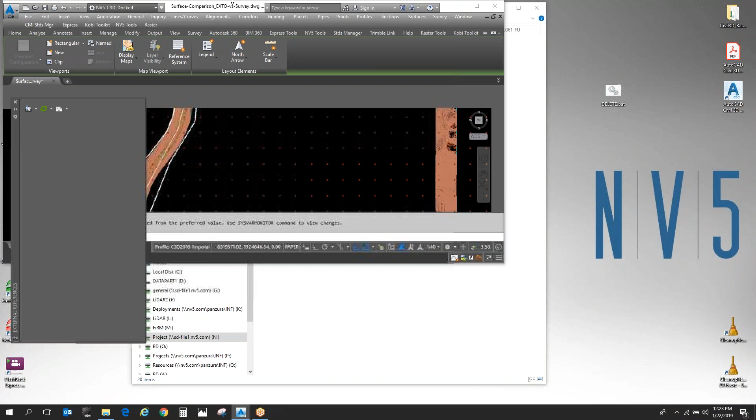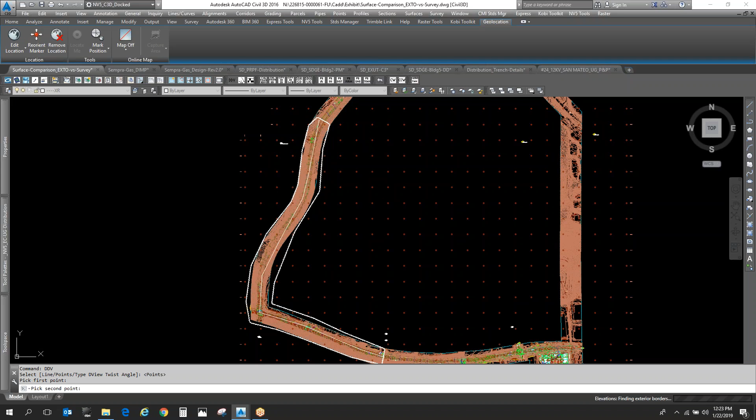All right, this is an issue that came up last week. Who wants to take a stab at UCS? Your UCS is this little icon here, right? What happens if my UCS does not look like that? Let's say it looks like... not that, because that's just going to rotate my view. Oh, and I should not have done that to this file. That was bad. What happens when your UCS does not have this little square in it?

So let me undo that. Oop. What does that mean when it doesn't have that little square? Yeah, there you go. It means that your coordinate system is not set to world, right?

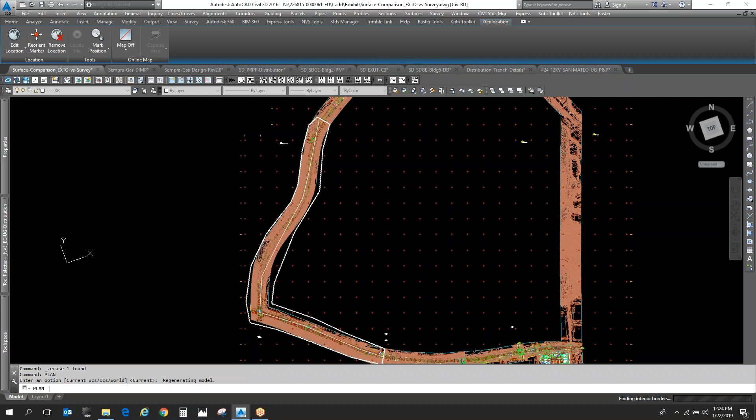So let's say your UCS looks like that. Let's make it so that you can't really tell that I defined my UCS. Let me rotate my plan so that the UCS still appears as an XY Cartesian plane, right? All right, so here it is. What happens now if I start drawing line work or trying to XREF other plans, other files? What's going to happen to those XREFs? Yeah, they're going to fly out in space, right?

So one of the things that we actually saw was the UCS was actually set not like this, not to world, but it actually had a 3D tilt to it. So everything that had been drawn in that drawing was no longer 2D line work. It was actually rotated in an XYZ plane, meaning none of that line work that got drawn was now accurate, right? Or true to scale.

So the UCS is a very important variable that a lot of times we take for granted and overlook. Really, there's no reason to change your UCS. Yeah, I was going to say, what would be the reason to do it? I don't know, if you can come up with one, I'd love to hear it. Looks better to you, that's all. Hey, I mean, yeah, you can always rotate your plan view, right? Yeah, and that's independent of your UCS.

So that was a really bad habit that I had for about 10 years, where I would constantly draw a line, change my UCS to that line, and then rotate my plan to current so that your stuff changes to that current UCS view, right? But then what happens, you forget to change your UCS back to world. You start XREFing things, and then they come out in space, right? So you don't have to do that because we have a LISP routine called DDV, right? That rotates your view however you want. So really there's no reason to play with your UCS. Leave it on world, all right? You can get into a lot of troubles when you start manipulating your UCS.

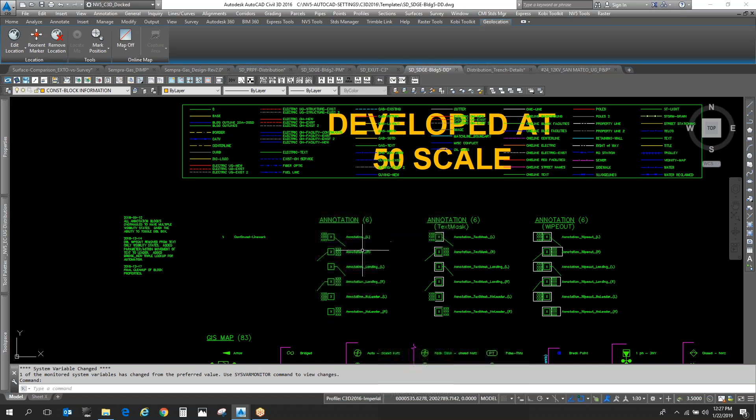So a lot of our files have a lot of proprietary intellectual property, right? That gives us a competitive edge in the industry, and it makes your life easier as drafters and designers, right? The last thing I want and the last thing that you want is to lose our competitive edge as a company. So we need to protect our data, right? And there's certain ways to do that. So I've come up with some LISP routines to kind of help automate all that stuff, right?

So there's a LISP routine that you can load. AP is for app load, which means you're loading a LISP routine. And this one is called, if I remember, transmit file cleanup. All right, so that's the name of the LISP routine. Again, you're never going to run this on your file, right? What's the procedure anytime you send a file outside of NV5?

Copy it to the deliverable folder, right? Deliverable, a folder with the company name you're sending it to, and then a folder with the date and a brief description, like 30% submittal or review by SDG&E, whatever it is.

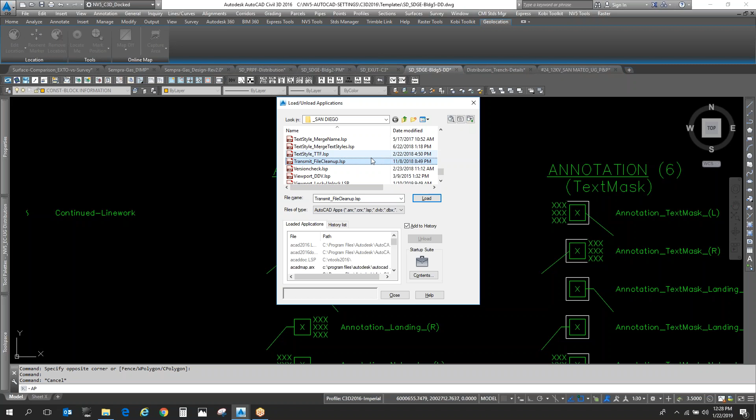You never want to run this on your file. You want to run it on the copy you're delivering. So I'm going to load this transmit file cleanup. Any Lisp routine I write will tell you in the command line to type file cleanup to run it. I'm going to type file cleanup.

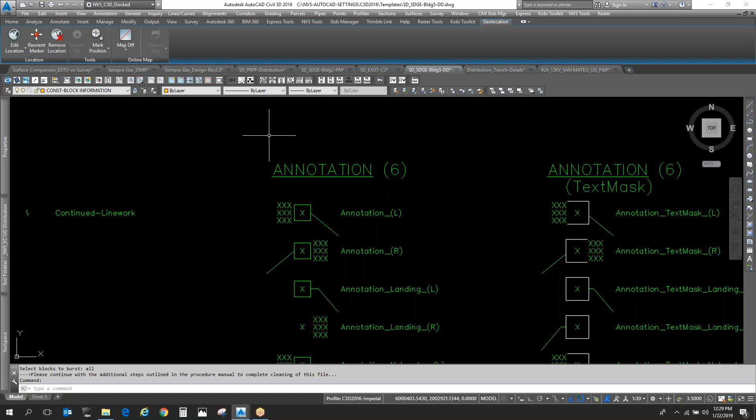So all those steps from your email are now one Lisp routine? They are one routine, but there are certain things you have to do. Right now it's saying select blocks to burst. I'm going to type all and hit enter. It's going to go through and think a little bit—it's actually exploding all those blocks, but not really exploding them.

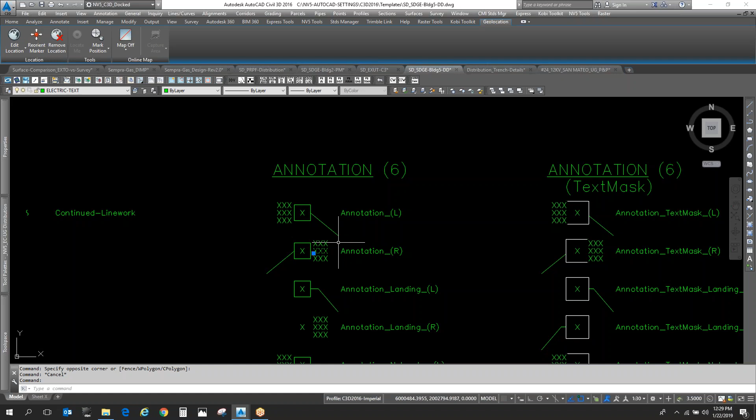Because if we explode it, it would still have intelligence to it. If you look at that document, I outline exactly what the Lisp routine does. The routine I wrote combines three or four different routines. What it actually does is explode everything to basic line and text, meaning we're keeping everything in-house. So this is no longer a dynamic block, no longer a block at all—just basic line work and text, which is what we want to send out of this building.

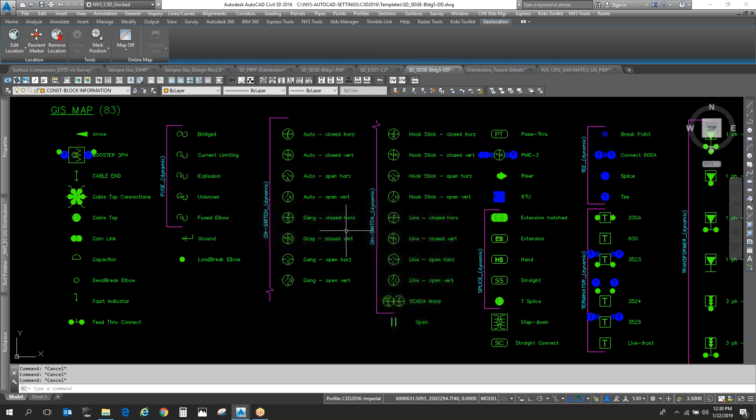Yeah, we can give them line and text—that's what we want, right? We don't want to give away any of our blocks, and we definitely don't want to give away any of our dynamic blocks. So this protects NV5's property rights, and protects your jobs. The more projects we get, the better we all are as a company.

Jared, question—Rick. When you burst that block, I saw that white outline. Does that mean it went to zero, right?

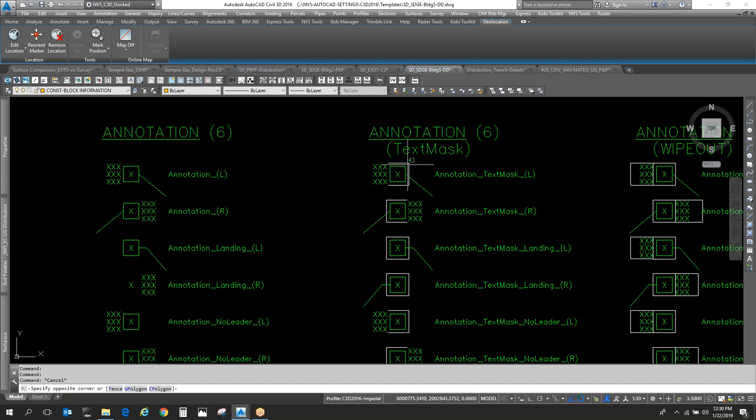So this white outline is a wipeout. This was requested by a lot of the groups. What you're actually seeing is the display order got kind of screwed up, so it's always good to send your wipeouts back behind. You'll notice we kind of lost that DBL box outline—if we send those behind, it comes back. It's on a wipeout layer that's non-plottable, but it wipes out the stuff behind it.

All right. You want to leave any of that information down to zero, zero. Oh yeah, so that's also included. That's the first step, actually, before you run the Lisp routine—to delete this block matrix, right?

This block matrix is just my way of telling you guys everything available in our template, in terms of blocks. Obviously Civil 3D styles, and there's a lot more, but these are all the blocks in the template for you guys to use. It's my way of communicating all that information to you. If we don't delete this, and if we don't run our program, we're basically handing it all to our competitors.

So yes, read that document. I did email it to everyone, so you should have a copy in your email, but it also exists on our server—under Q, training and learning, NV5 manuals and procedures. All right, so that's section C, sending files.

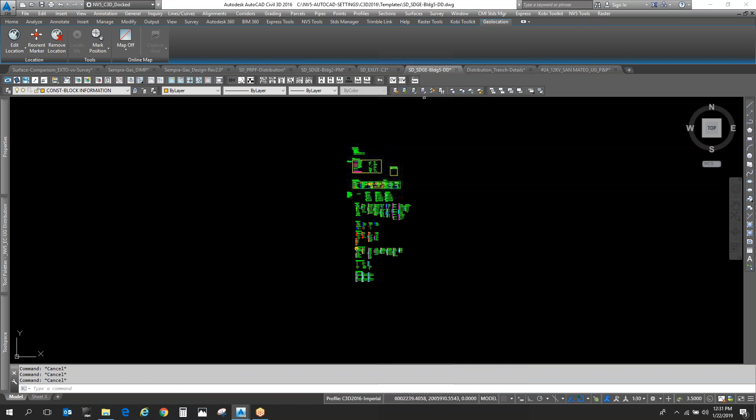All right, I'm going to close that file. Jared—yes sir, how do I get to the San Diego folder? To where we have all the Lisp routines? Yeah. Let me open my template again real quick.

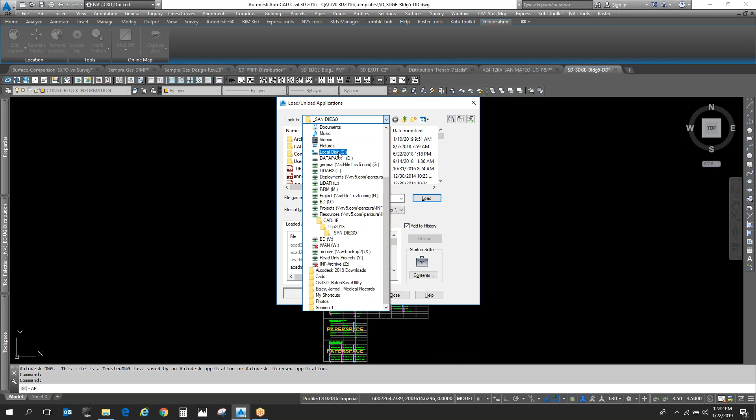So everything has been stored locally on your computer. We're trying to get away from utilizing our network, so hopefully your computer has the latest update and it's pathed to your C drive. This one actually isn't—that's fine, you can use the Q as well, but I'd prefer if you used your C. So I'm going to show you on your C drive, all right?

On your C drive, everything dealing with AutoCAD is under NV5 AutoCAD settings, Civil 3D shared, and then LISP 2013—that's where they all are. And then there's the San Diego folder. Anything I've done here over the last four years I've kind of put into that San Diego folder and given it some naming so you can easily find it, right?

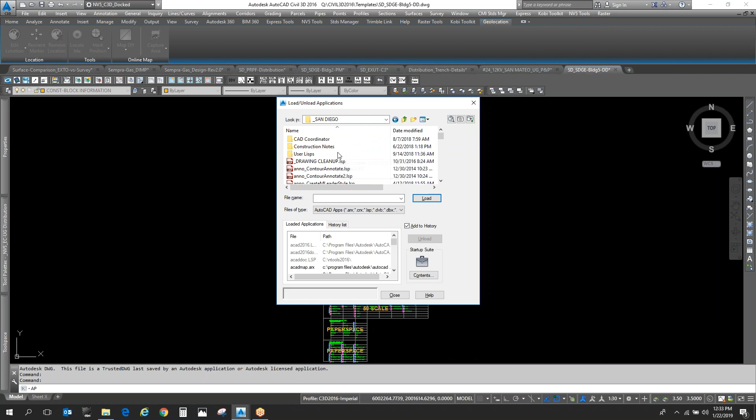This makes it so that you can also take your computer outside of the office and still have all of our resources and still work. There's a lot of different reasons for doing that.

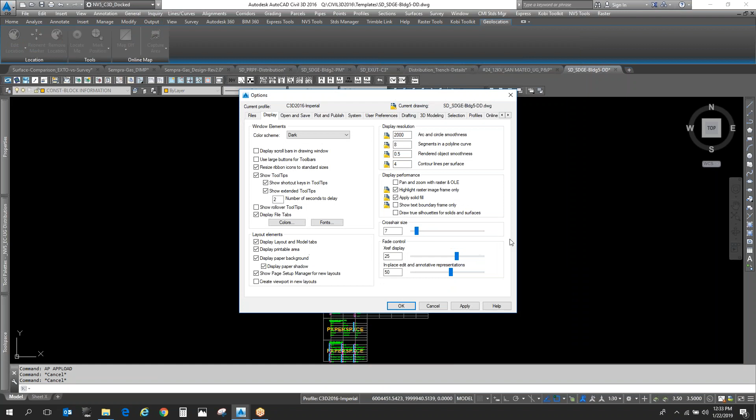One of the things we ran into, and my computer is a prime example right now, is every once in a while you see that red X on your drive. If you open AutoCAD and one of your drives is disconnected or has that red X, it actually removes the path from AutoCAD. So what started happening here, especially with our wonderful network, is those support file search paths disappeared. That Q blah blah blah to the LISP was getting removed. That's why for a while you couldn't use INA and ISC, all that stuff. It's because at one point you opened AutoCAD with that red X on your drive and it removes the support path. So that's some of the reasons why we're continually moving things to your C drive more and more.

Now I'm doing almost everything, not quite everything, but almost everything. LISP is one of the new ones that got moved to your C drive. If you're ever in question, you can go into options, go into file support, and you should be able to see where that path is. So right away here, you know this computer's seen the latest update, and that's the path to the LISP routines on the C drive.

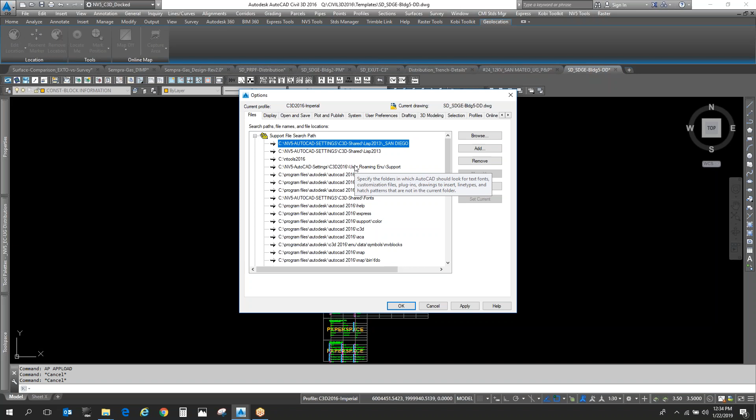So there are a couple new LISP routines. I'm not really going to cover them too much, just kind of mention them, not going to demonstrate them. There's a LISP routine for GIS data where you can select by object data, so you can start utilizing your GIS information to put those entities on special layers, and then utilize them in AutoCAD like you normally would, by layers, not by attribute data.

And then obviously there's some LISP routines, part of that transmit file cleanup that I wrote independently. There's one for block dynamic strip, which takes that dynamic block and explodes it so that it loses its dynamic properties but still remains as a block. Then there was another one I created that was basically block burst, to piggyback on that dynamic strip so that it will actually burst all your attributes into lines and text, basically.

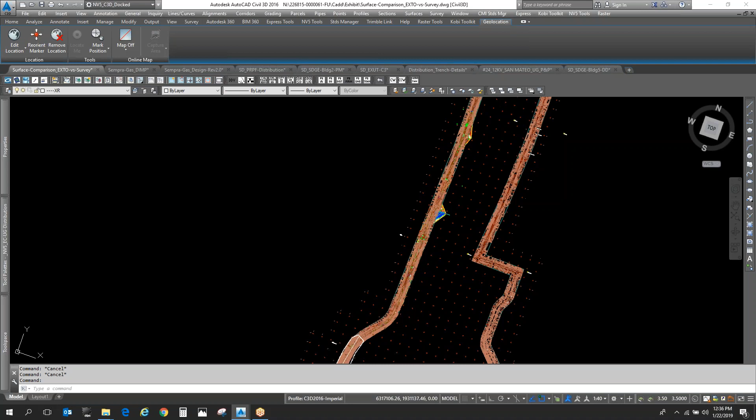He discovered an error with the project that previous ten designers didn't notice, and he caught it at almost a 60% submittal. This would have been rather embarrassing if these plans had left our building in a construction phase and we hadn't discovered this.

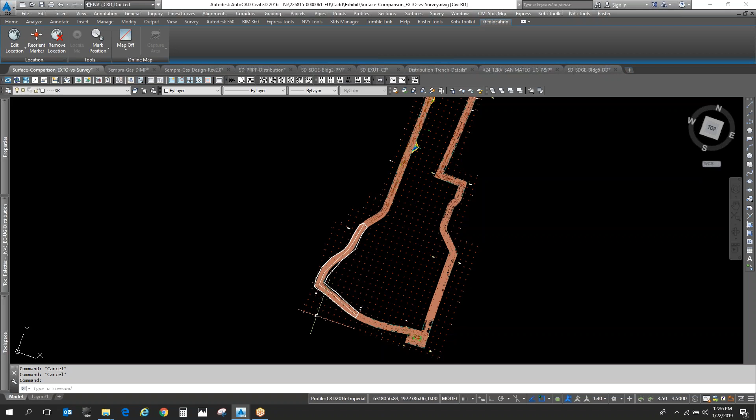So what did he discover? He discovered a bust in the aerial topography provided by the aerial consultant. The bust was about 2 feet vertically over about a mile length of the project. So what you see before you is just that. All this is the project here, and everything in this white cloud is the area that is busted by about 2 feet vertically.

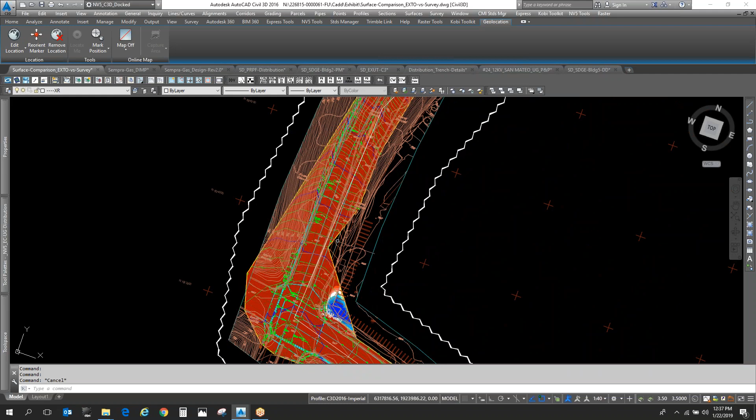What I did real quick was take our survey shots, all of our potholes, create a surface, and run a volume surface to compare the two, the aerialist versus our survey, and started coming up with all these color schemes. If I hover my cursor over here, I don't know if you can see that very well, but there's a 1.84 feet difference between the two surfaces.

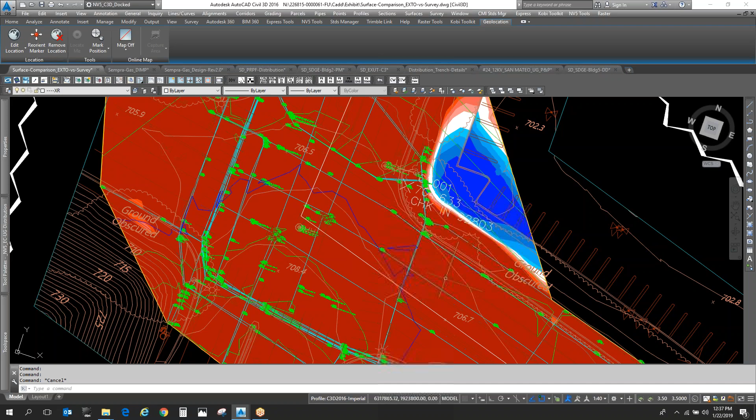So we had plenty of opportunity to catch this, and it really should have been caught prior to the 60% submittal stage. What are ways that we could have caught this earlier? How did you catch it? The easiest way is to turn your drawing sideways, like this, sometimes the 3D view or whatever.

Well, you took our survey shots and looked at it. I did, yeah, because you would see the survey shots hovering like on the ground. That's a very good way of doing it.

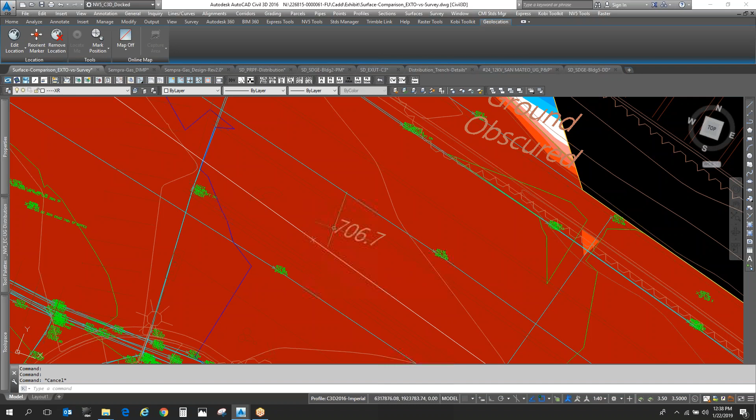So a couple things is, you don't even have to use 3D to see the difference, right? Your topography file that the aerialist gives you contains spot elevations, right? And part of those spot elevations is this big, bold, ugly text. So right away, if I'm halfway looking at this project, I see this call out here, and I see our survey shots on either side of it, and our survey shots are over 2 feet lower, right?

So really, you don't need any Civil 3D knowledge. You don't need to do a 3D orbit. You don't need to do any Civil 3D functionality. Just seeing what's on your screen could have alerted us that we've got major issues somewhere in our design.

Fortunately, it wasn't our fault, it was actually the aerialist's fault, so we don't have to eat all that time. But this could have been caught way sooner, right? 60% after profiling our electrical trench, after doing all of our pothole utilities and profile. This could have been caught and should have been caught a lot sooner.

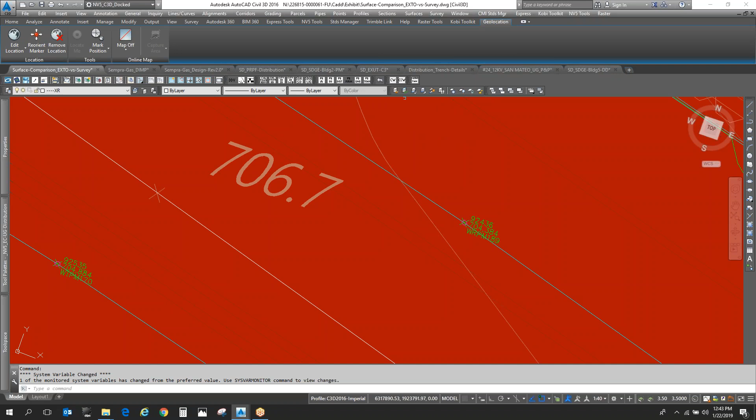All right, so good job, Gary Cooper. Gold star. Thank you. All right, the next thing.

This came up a couple times over the last couple months, so I wanted to review it real quick. On your pipe networks, let's say we're creating encasement, electrical encasement. So I'm going to come in here and edit my pipe network, that's how we create pipes. I'll do electrical package, and the only one available is a 12 by 12. Sometimes we don't have the real dimensions, but sometimes we do. Sometimes we get the pothole at the top and the bottom, and we need to represent that, especially if it's a 36-inch high package. We need to model that correctly.

So how do we go about doing that? You actually need to edit your parts list. In your tool space, under your settings tab, you'll go to pipe network, expand your parts list. Make sure you're doing it in the right file. This one is the EXEC, existing electrical. Right click, edit. It'll bring up this, make sure you're on the pipes tab. Here's your electrical package custom sizes.

So we can expand this and we can see there's just a 12 by 12. This is where obviously I could populate every single combination of pipe encasement, but that would be impractical. It'd be hundreds upon hundreds of possibilities. So it's really up to you guys to add these as you find them in your project. It's rather easy, you just right click on your electrical package custom size catalog, add part size.

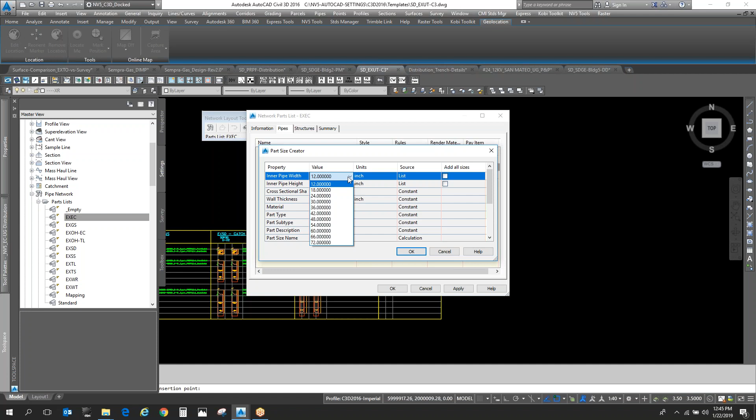These are the two parameters that you add: the width, typically we don't really know that, so I started at 12 inches and you have 6-inch increments. Don't get caught up on the width of it. The really important thing is the depth. Try to get the width right, but a lot of times you're not going to know the width. The important part is the inner pipe height. These start at 8 inches and go incrementally at 1 inch all the way up to a 90-inch depth, or high pipe or encasement in this case.

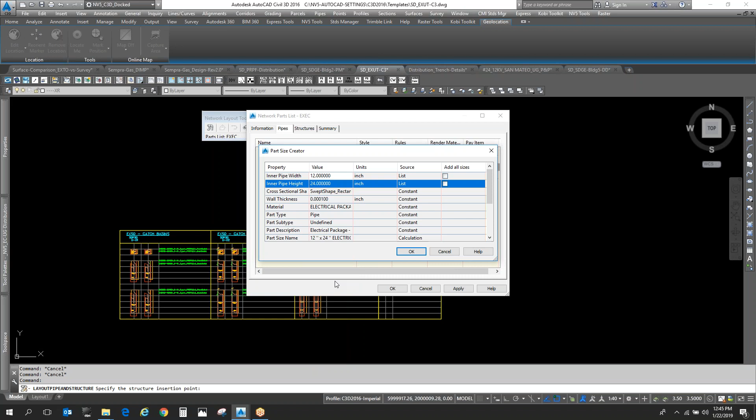So let's say we'll do a 24-inch, we'll hit OK. There's one other thing that you need to do after adding it, and that's to assign a style and rules to that newly added part. If you add multiple, you don't have to do it to each one. The trick is this little save icon button, why it's a little disk, I don't know. But this will apply it to everything in this family. So I'm going to do that.

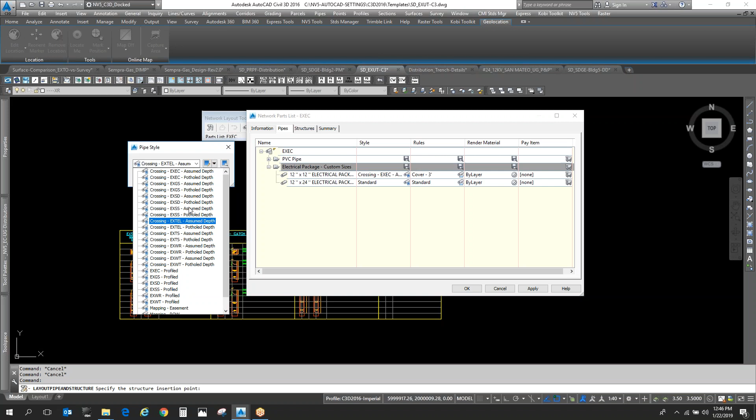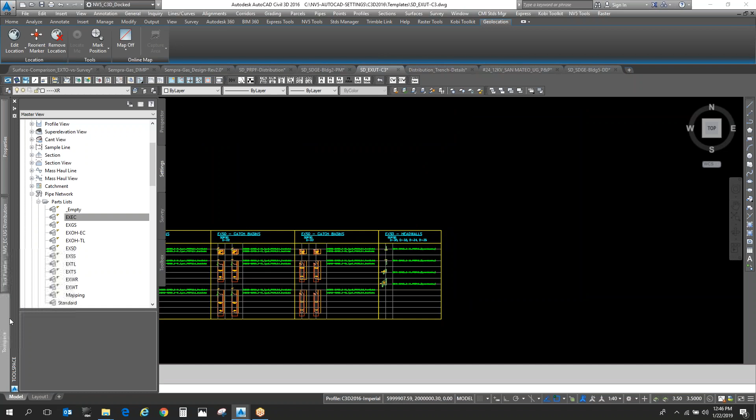So electrical, I'll change it to pothole just for fun, and you'll see both of them update. Same thing with the cover, typically just follow what's there: cover 3 feet, cover 3 feet. Then you hit OK. And then suddenly, sometimes you have to close this because it needs to reread it. So we'll go back to Prospector, edit my pipe network, and now I've got the 12 by 24. So for all your encasements, that's going to be critical. You guys need to go through those steps to add those custom part sizes to your drawing file.

Next question, participation: what goes in your PRUG file? All right, so we got alignments. What else? Profiles. What's that? Structure bed. Pads. Anybody disagree with any of that stuff being said? Profiles? PRPF, profile. Okay, yeah.

How about a trick question: there should not be a PRUG file on our network, right? What does PRUG stand for? I thought it meant proposed underground. All right, so if it's underground, what is that? Is it your alignment? Is it your profile? Don't we have separate files for that information? All right, so part of this is a little bit on my fault, I'll man up and take ownership of it. So I've corrected that error.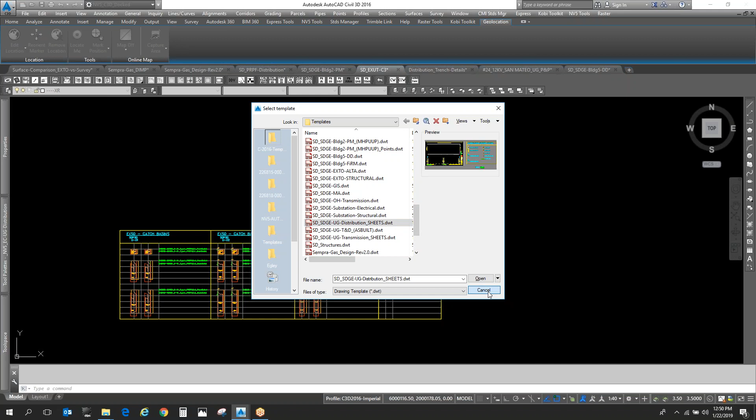So hang with me, we've got still quite a bit to cover, but I'll wrap it up here shortly. Some things to keep aware of - there's another new template. We keep expanding our service offerings, which means we need new AutoCAD templates and new tool palettes to support all these workflows.

So the first workflow that's kind of new is called DIMP work for the gas group. If you're in the gas group and you're working on DIMP projects, you now have a template and blocks to help you with that workflow. You also have a tool palette specifically designed for that - an NV5 gas DIMP tool palette, with existing fittings, annotation blocks, some simple parts, and proposed fittings as well. That's all in the template and tool palette to support that workflow.

All right, the next gift card goes to Edgar. What? Yeah, exactly, so he gets credit for this.

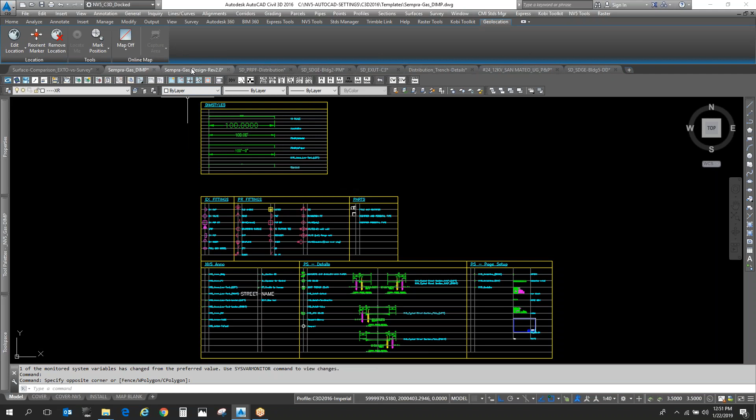He gave a lot of valuable input on our gas design, alignment, and profile labels. He brought to my attention that we really need different labels for an as-built completion set as opposed to design. So now inside this template, we have that developed thanks to his input. If I go in here and look at alignment label styles, station, profile geometry point - we have labels for as-built and design circumstances, the difference being how we treat the pipeline stationing. In your as-built, you just have your PS, no HS, and in design I believe you have both your HS and your PS.

So kind of labels to support that - that goes with your alignment profile geometry points as well as your profile horizontal geometry points. Both of those have been developed due to his input, and that should speed up a lot of your drafting for those plans.

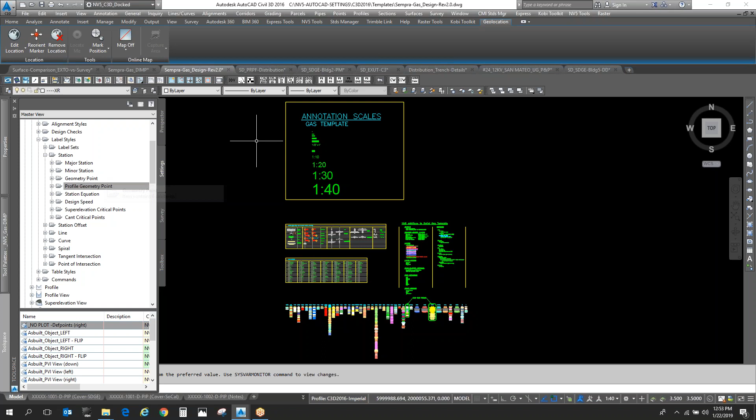This next one you guys should be pretty excited about. Let's see here, which file - this one here. This is something that will be implemented in the next day or two. So this is our PRPF. The first thing I'm going to do - well, not the first thing, but in this case, I'm going to bring in some pipe networks. So there's only the PREC.

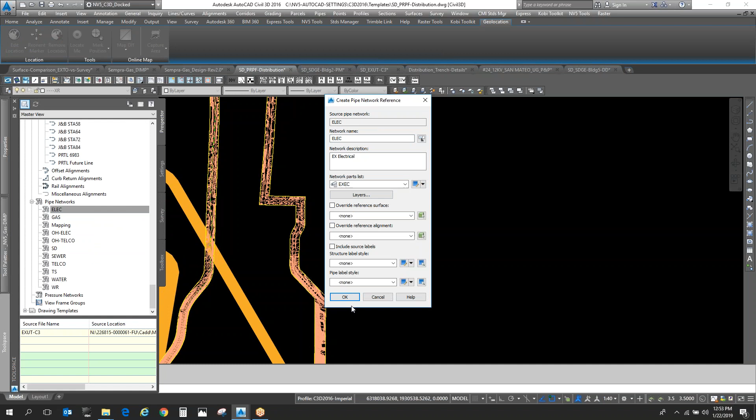I'm going to bring in my electrical, and I'm going to bring in my gas. Then the next thing I'm interested in is creating a profile view to kind of see what those pipe networks look like.

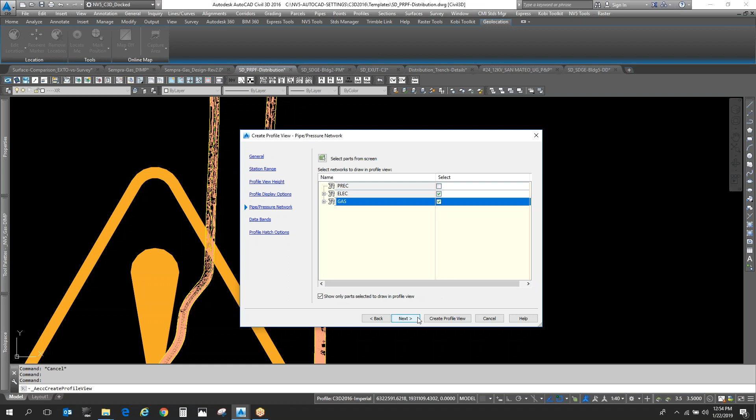Previously, what did it kind of look like when you brought in pipe networks? Just a bunch of green circles, right? And it was pretty difficult to distinguish what network it was or what utility it was. So we've made some modifications - if I zoom in here, you can start to see each network will have a separate color. Your red is going to be electrical, and it's actually going to come on its own layer as well - so pipe network profile, electrical, and then same with gas.

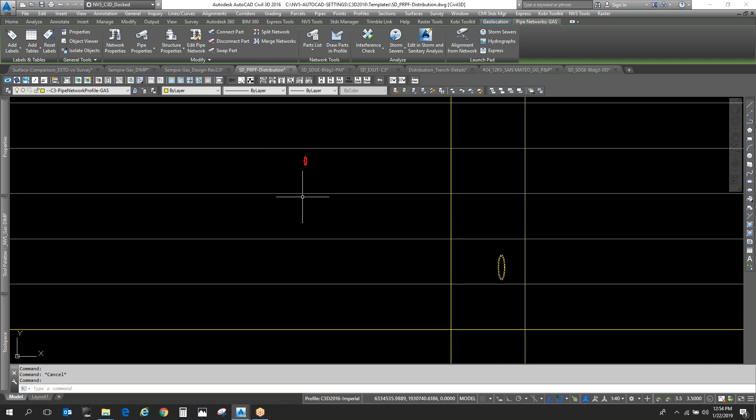Gas is going to be yellow and come on its own layer as well. So this will help you guys distinguish between what utilities you're seeing. It'll kind of help you judge depths, right?

This is electrical. I expect there to be how much cover on an electrical line? About 30 inches, 36 inches. So does this look reasonable?

All right, how about my gas? How many inches or feet of cover? 4 or 5, right? So does this look reasonable? Yep. 1, 2, 3, 4.

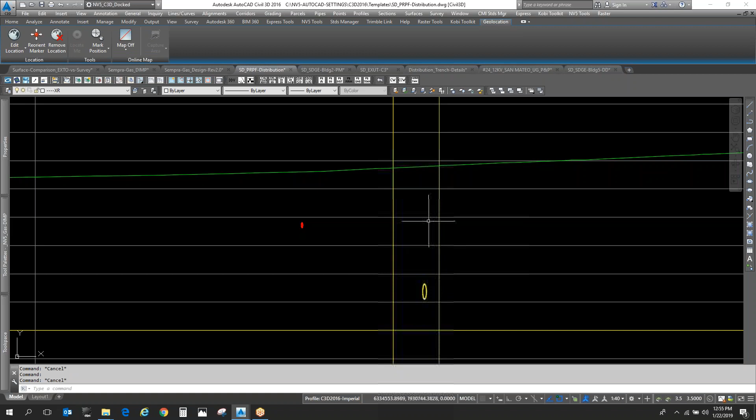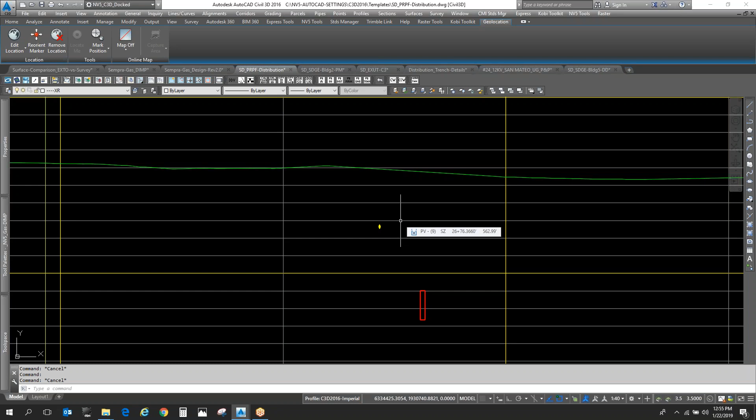Yes, right? So hopefully it helps you guys identify your utilities a little bit more easily, makes your design a little bit easier to understand and gives you a full grasp of what you're seeing on your screen. That's something currently not in the template, but will probably be there by the end of the day. Not quite formulated correctly in the template yet, but I did it on this file real quick. Expect to see that. It'll kind of follow the same colors as our exhibit.

In terms of telco, it's a purple line, sewer is magenta, storm drain is the green color.

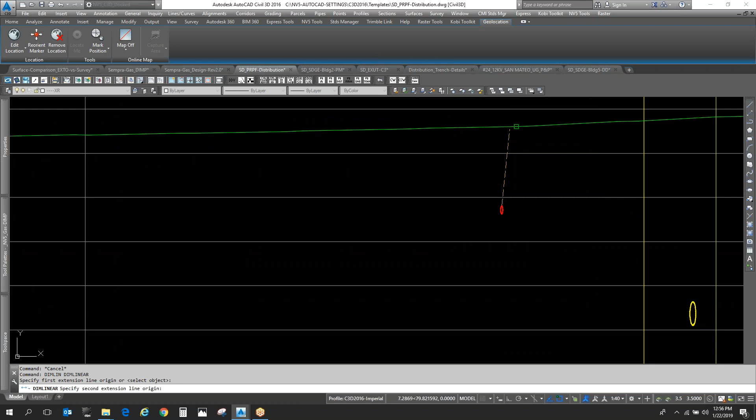What I'm suggesting you do is just do that. Is that what, just automatically? Automatically. When you label, when you annotate, you do complete network. And that dimension is reduced to 0.4, isn't it now?

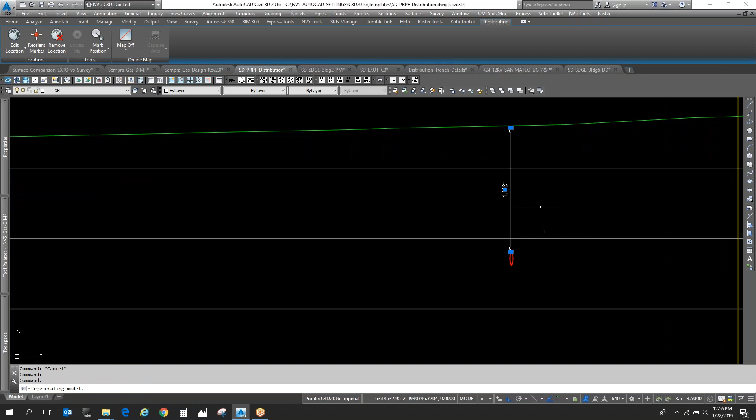I don't know, I created just a random dimension. So this is on a 2 exaggeration. Obviously, mine is 4. Yeah, okay. So obviously before you create your dimensions, you set your dimension style to current.

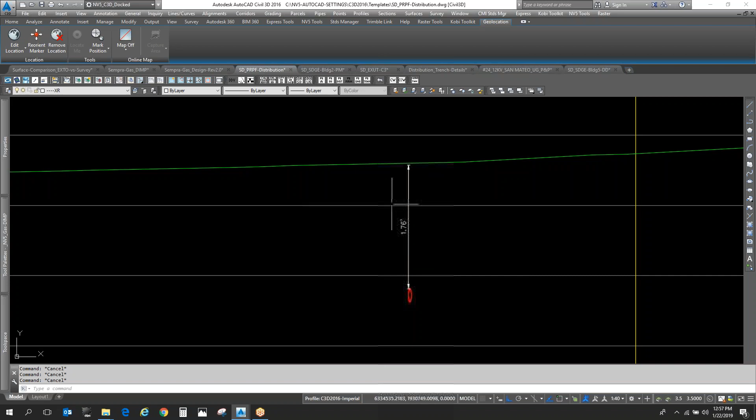Or another annotation style, maybe just for that. I don't think there's an automated way to do it. I'll look into that, but I'm very doubtful there's a way to get that to work. The way I currently do it is just a linear dimension, and just don't be super picky, but something close.

You can get the depth in the annotate on the profile annotation. You can, but you still have to pick the 2 points. It just creates a label, and you do the same thing. Yeah, you could do an annotation.

This may be a little bit better in terms of if things move. The dimensions are a lot easier to manipulate. Either way, you should have some sort of annotation here. Whether you use a dimension or annotation, you should be able to see quickly the cover on all your existing utilities.

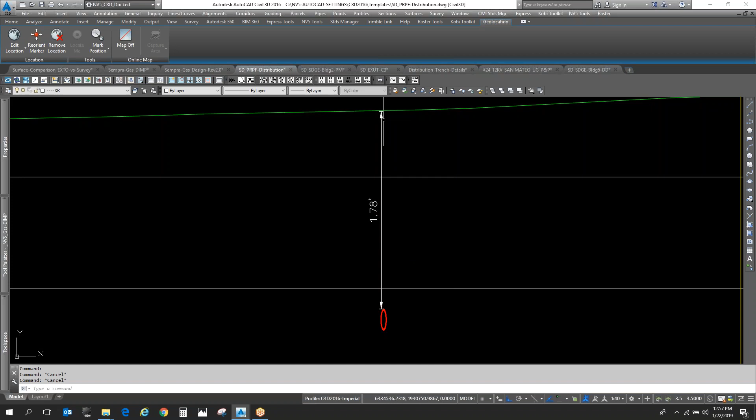So this was some direction that we gained from SDG&E late last week. They're changing their system, right? DPSS versus SAP. So they have a new title block to support all the SAP work.

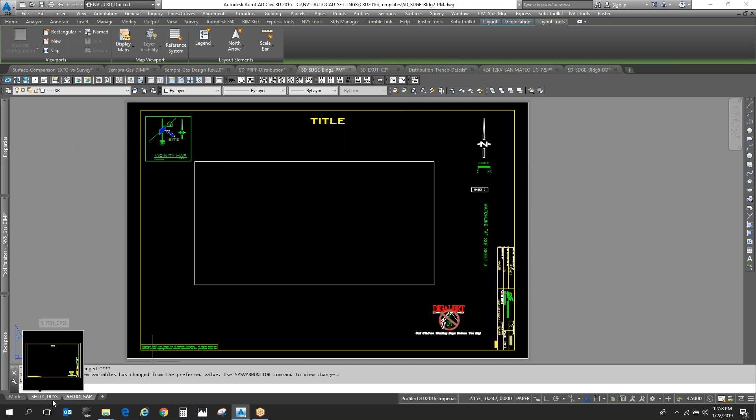Inside the Building 2 template, you'll see two layout tabs: one for the old title block for DPSS, and then a new one for SAP. So make sure you know which one to use for your project. Most new work is going to be the SAP one, and this is for Building 2.

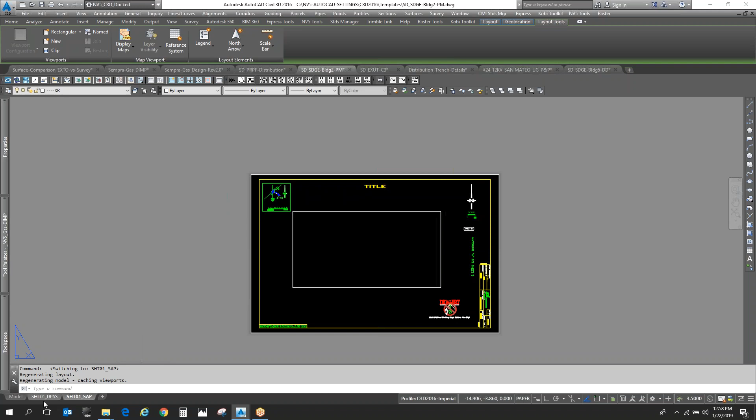First thing you would do if you're doing Building 2 or applicant design is come in here, delete the DPSS one, and use the SAP one. It's a little different - you have a project notification number, job notification number. That's really the big difference.

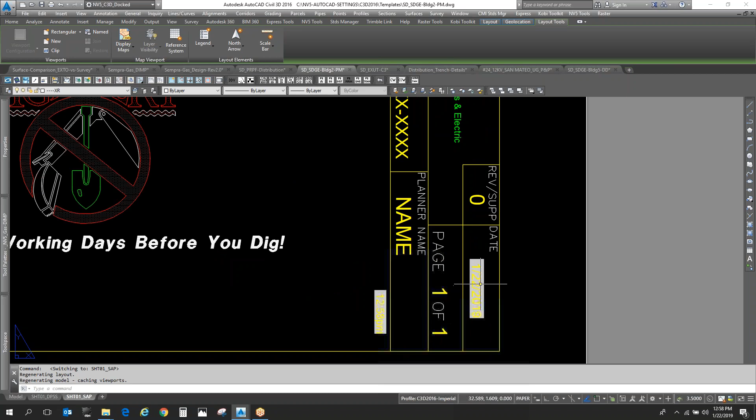Some of this looks a little different. Previously, the revision was in the corner; now it's up here a little bit. They're using fields for the date and time. So just a couple tweaks - the drawing name goes up here instead of down here.

Just a couple tweaks that they made to their system that they are requesting we incorporate onto all of our submittals. So that's in the templates now - be sure to use that new title block. There's a new one coming out for Building 5 soon. Yes, there is.

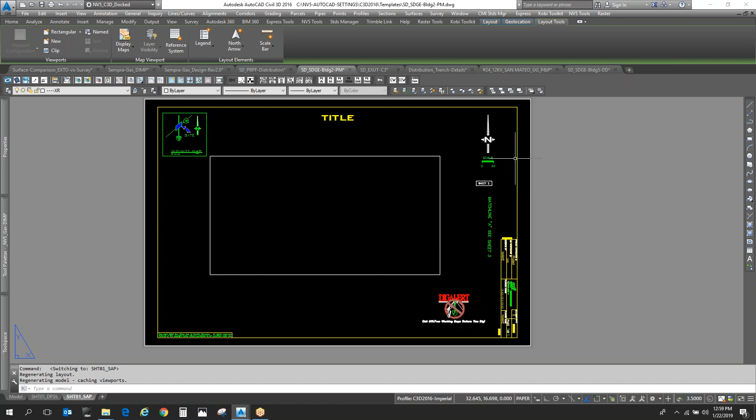All right, last thing I'll cover is just a lot of block updates that have occurred, first group being for distribution design and firm. We looked at all of our annotation last time. Let me just kind of clean this up a little bit for you guys to see.

So previously, we added these two grips, right? So you can toggle the text separate from the DBL and switch between the two. The one thing that is now being incorporated is if I remove the DBL and just text only, you'll notice that the text actually moves down to where the leader starts as well. Before it was kind of floating up here and that leader would be in the second line of text. So now your first line of text moves down to where that leader starts. So that is

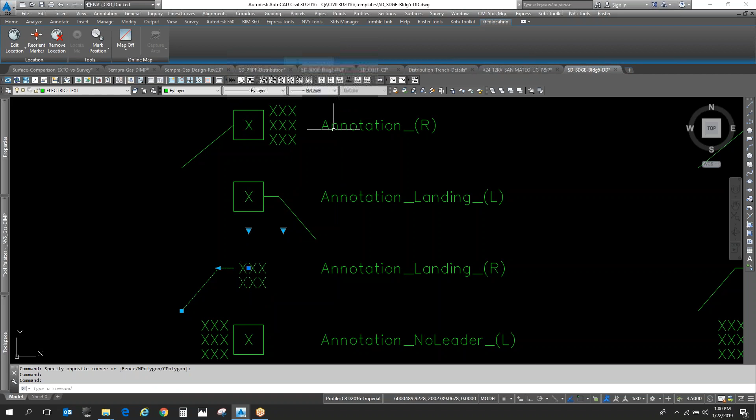per the wish list of Johnny Vigil. So he gets a $50 Amazon gift card for his contribution for just saying, hey Jared, can we get that to move down and adjust accordingly? So that looks like a normal leader would.

We also cleaned up on the text mask and wipeout. This is something that we noticed. Previously, if you did text only, the wipeout didn't go away. It remained there. So now that wipeout or text mask goes away when you do text only and reappears when you bring back the DBL box.

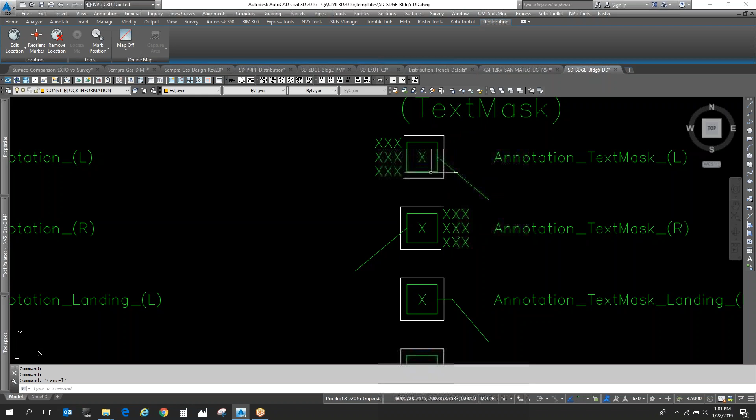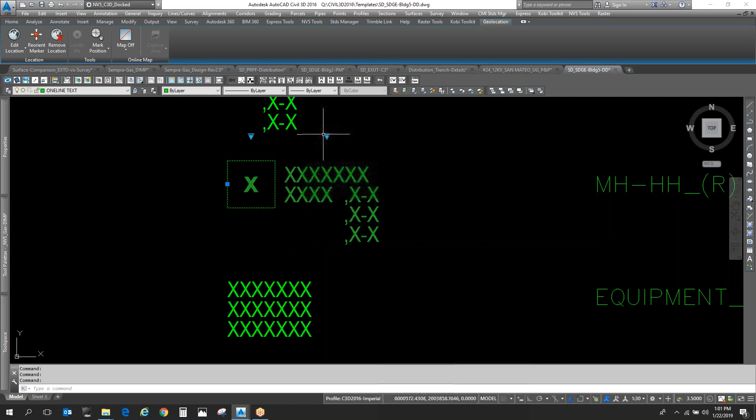We then followed the same principle. Johnny asked, hey, well what about all of our one-line drawings? Can we do the same thing? I said sure. So now all of your one-line annotation has the same things available. You can toggle the DBL on and off. And when you change the lines, obviously that's not too special there. Those don't move. We do have a left and right versions applied to that because of the DBL and just the way it all works. So be sure you guys realize that.

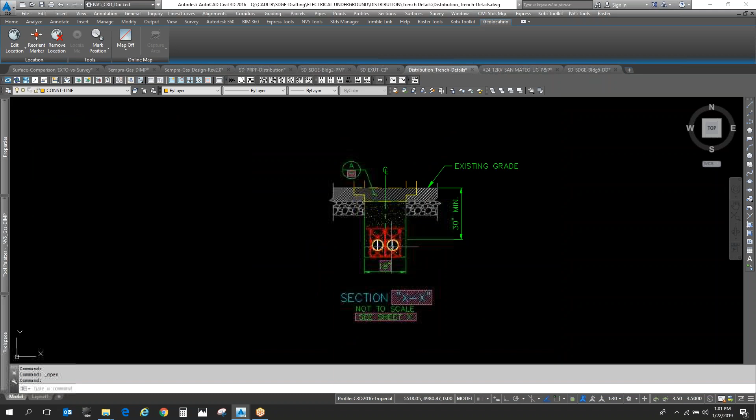And then the next quick couple things here. Trench details, right? Everybody's favorite topic. Who here in the last month has received a red line comment from Mr. Webb? Since he's no longer here, I can talk about him, right? Yeah, to add a T-cut to your asphalt.

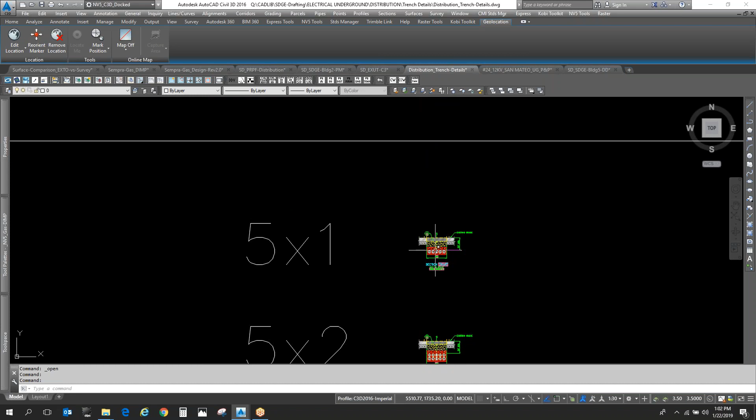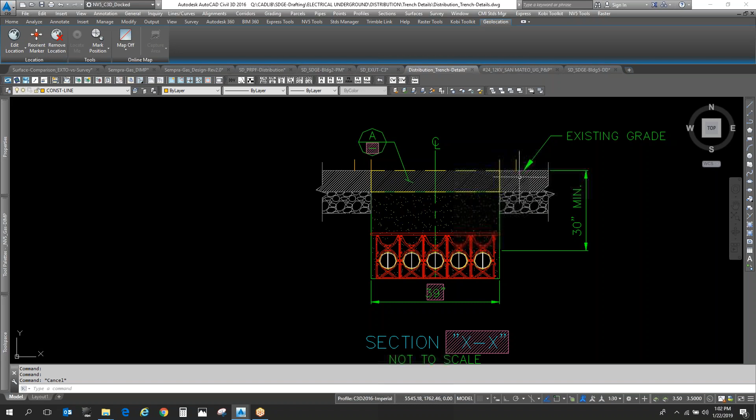Anybody receive that? I know some people have. So previously what this kind of looked like, do you guys know what I mean when I say T-cut on your asphalt rehabilitation? This is the way that we are currently showing these sections, right? Just wherever our trench is, that's where our asphalt repair is. This is proposed, everything else is existing, right? If you actually look at the City of San Diego standards, that is not what the trench rehabilitation looks like, right? It projects out. Yeah.

So congratulations, these blocks now accommodate that. You'll notice 2 additional grips at your top. So just grip that and snap it to that point, and now you have a T-cut for your asphalt repair. All right, so make sure you guys are showing that correctly on our plans. Mark is going to be redlining plans like crazy about that, and yeah, previously it was a pain to do that. So just grip back and forth to toggle it on and off.

So that's really important to let the contractor know exactly what's expected of him, and so that it gets built appropriately. Asphalt rehab is your biggest impact on the people using the roads that we're doing construction in. And that's where the city receives the most complaints, is the conditioning of pavement after a project. And so this little detail is going to be scrutinized more and more. So we need to make sure we're reflecting it accurately on our plans.

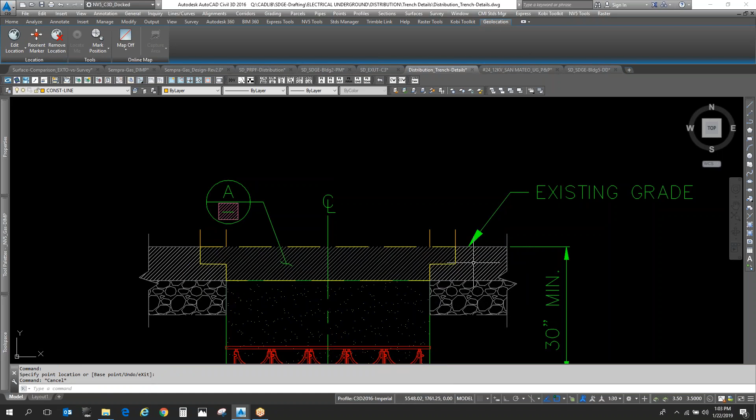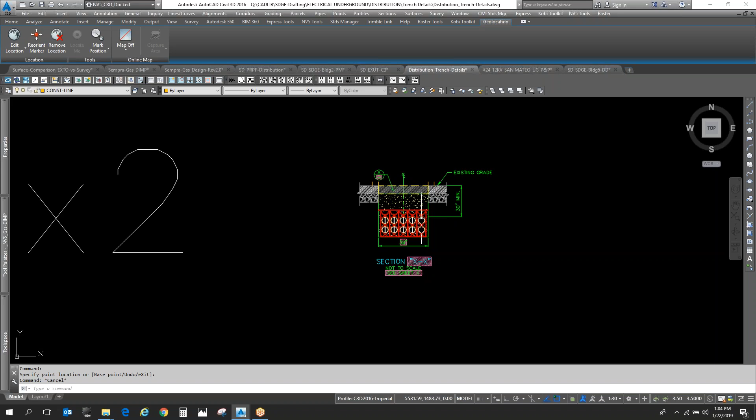The other thing I will mention here, I won't mention, because we start getting into transmission. So somebody missed a big opportunity to get a gift card. We do not really have trench details for transmission. So I am in the process of developing that. So all these sections that you see here, or details as we call them, are being populated for transmission.

Those will be available in the next update, in the next Lunch and Learn. But you'll have all kinds of trench details, as well as grounding details, pole details, all those typical project blocks that you typically run into on your transmission design for 230 kV. So we had them for 69 and 138 kV for transmission, but we didn't have anything really for 230. So all those blocks are being developed right now.